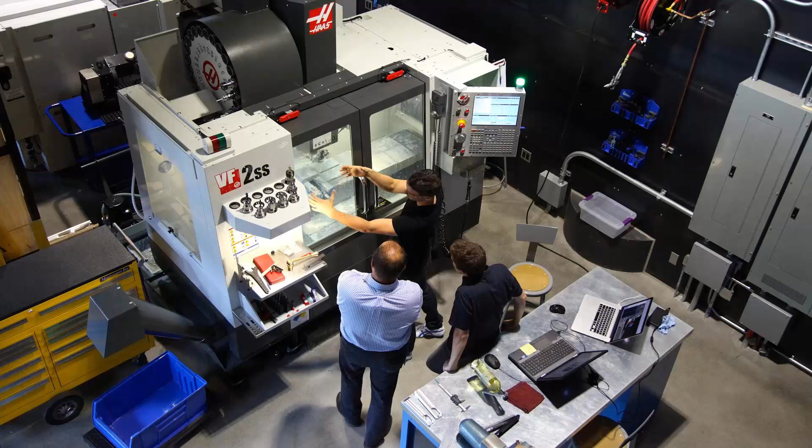I want to start our webinar today by talking about a facility located in San Francisco called Pier 9. Pier 9 is sort of like a dream space for engineers and designers. Inside this space are all these wonderful machines that most engineers and designers can only ever dream of having access to, and these machines are used to help develop the solutions that our programmers work on.

But they are also used by what are called artists in residence. These artists come and do a residence at Pier 9 where they really push our solutions to the limit. A really good example of this is shown in the following video.

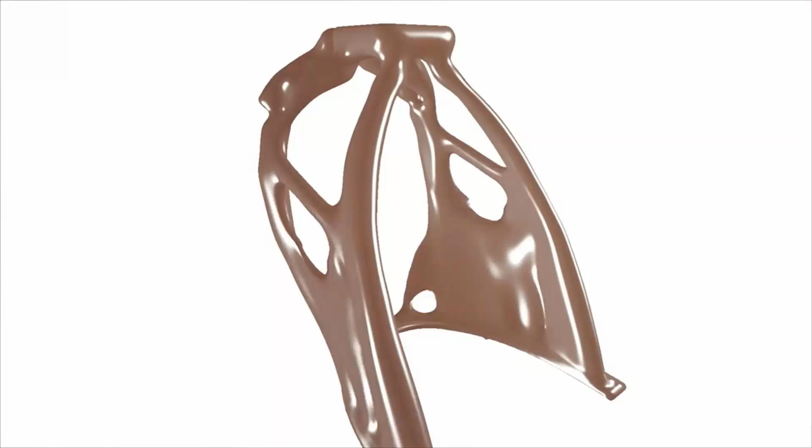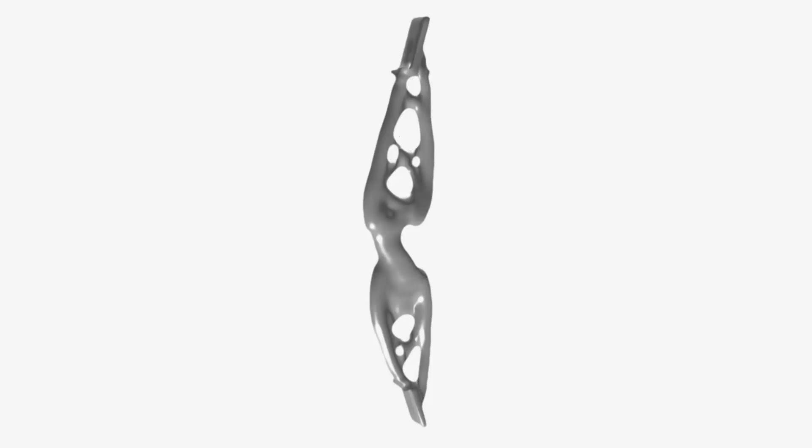This video highlights the use of some generative design technology, and it really shows you some of the future of where generative design will be. In this instance, the artist has come up with the idea of creating the structural section of an archer's bow, and they're going to use this technology to design the product for them.

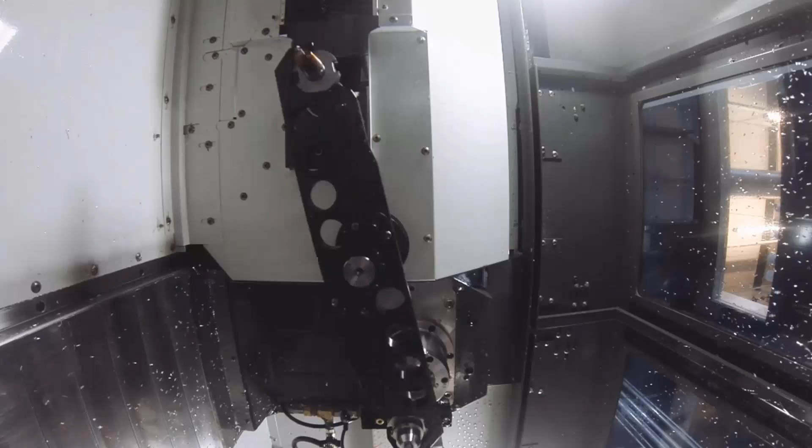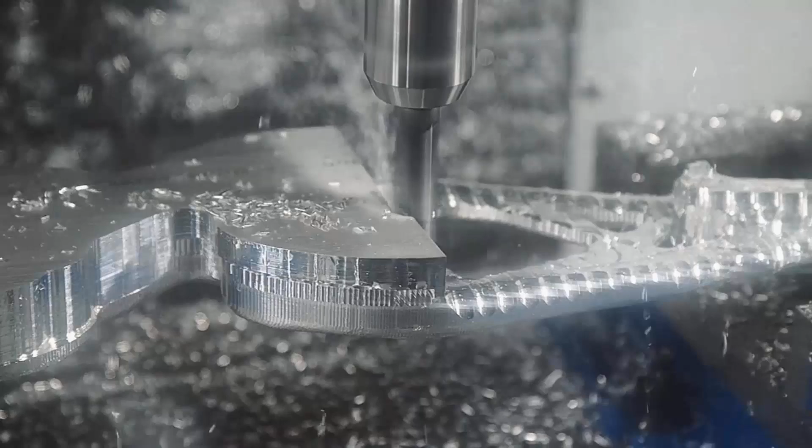In essence, the machine or the software is creating the geometry based on parameters: the loads, the volume of space that the material can occupy, the material that the part is being made out of, and then it comes up with that optimized shape.

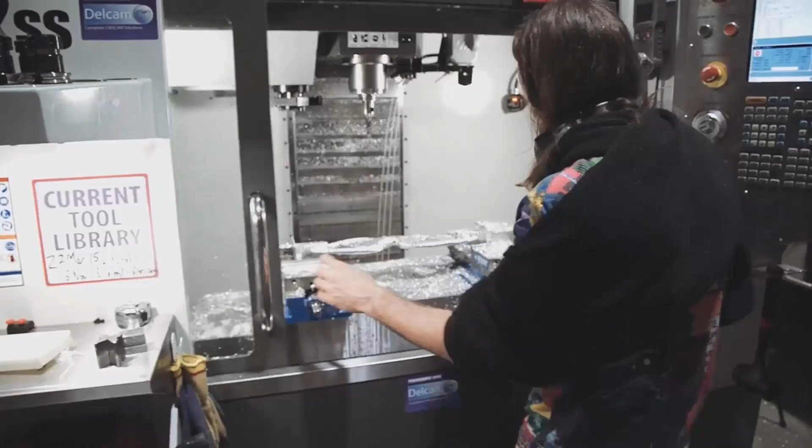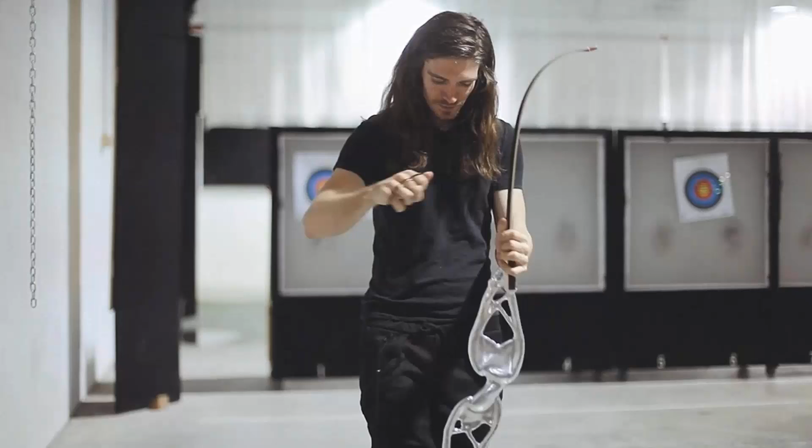You can see here that the part is actually being milled out of a solid block of aluminium. It could have quite easily been 3D printed out of aluminium or titanium, for instance, and then it's assembled to show that the bow is a functional piece of geometry, not necessarily just a piece of art.

I like this video because it really highlights the changing landscape of manufacturing and the new innovative ways that manufacturers in the future will use technology to help improve their designs, but also to segregate themselves from their competitors. This really does bode well for the future of making things.

If you've attended any of my webinars or seminars recently, you will have heard me talk about the future of making things. In particular, we talk about three disruptive factors: the methods of production, the demand of consumers, and the types of products that we make. Each of these has elements of generative design contained within them.

New manufacturing processes and new ways that we design our products are specifically related to generative design. The demand from the customer is that there's a drive now for more optimized solutions and products, and the products themselves need to be lighter, smarter, and better designed.

If you look at each of these disruptive factors, there are elements contained inside each of those that are particular to the need to start considering the ways that generative design can help you in your design processes.

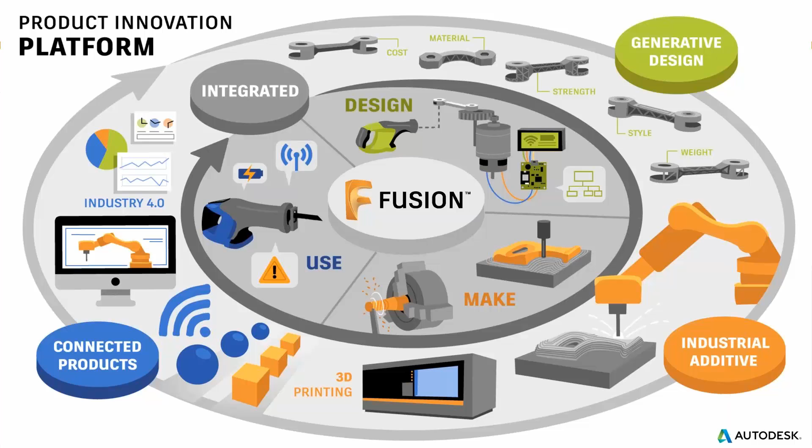If we move forward and look at why you would use simulation, we've had this discussion a number of times over the last 6 or 12 months in a number of webinars I've run. Simulation really does help make better decisions, but more importantly, it helps you make those decisions sooner, and we'll try to highlight that through today's webinar.

If you look at some of the questions that engineers are asking themselves day in, day out: will my part fail? Will it overheat? How can I produce components faster? How strong does it need to be? Will failure occur, and if so, when? All of these types of questions engineers are asking themselves, trying to predict the answers, and that's where simulation plays a role.

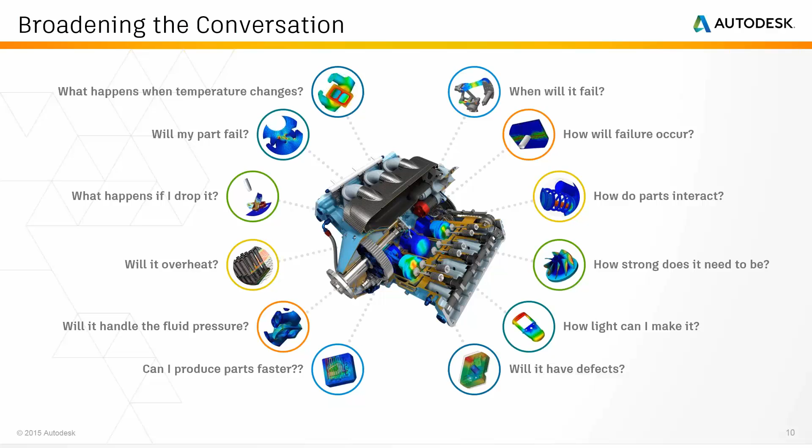And if we've gone through all of the stages of producing a detailed design, the tooling, maybe even made some parts, then the cost associated with making change that late in the life cycle is quite possibly prohibitive and could potentially put a project at risk.

If you consider pushing that forward, much earlier in the design stage, then the cost associated with making the change is significantly less because the change itself is much easier. Generative design really does push the boundary because it's pushing a lot of that simulation and design stage right back to the conceptual, very early stage design in the life cycle.

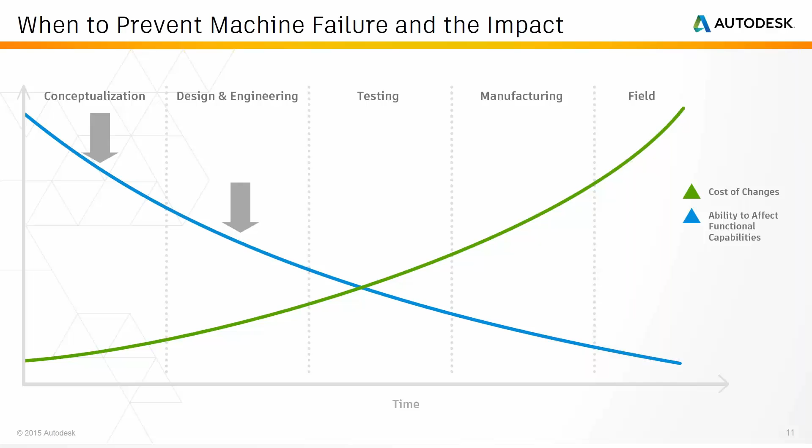If we consider the advantages of using simulation, there's obviously time. If we can reduce the number of iterations that we need to make of our parts, then it's going to save us time. Potentially it's going to save us money as a consequence of that, not only the development time, but also the cost to actually develop prototypes and test your products. Maybe even more importantly, it's going to give us some insight into the way that our products are going to perform.

But I'd like to highlight today the way that simulation in particular, how some of this predictive analysis or generative design can help you innovate new products. So a couple of quick examples.

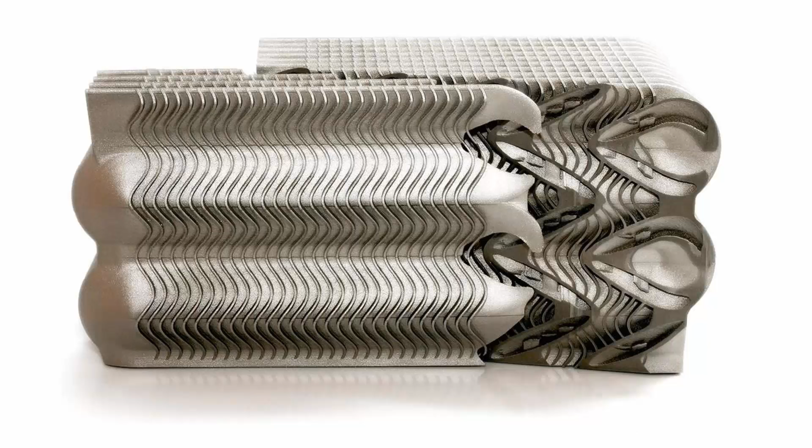Some of you may have seen this example before. I've used it a couple of times, but I think it's quite innovative in the sense that this product for this customer could completely radicalize or change and disrupt the industry that it's in. It's a heat exchanger, a product that was designed using generative design. So it wasn't designed necessarily by a human. The human put in the parameters associated with the volume, the size, the space that could be used in this case, the material, maybe the material that was being cooled or heated, and then the software took over and created the geometry of the part.

If you consider this for a moment, it's a very complex part, it would have taken considerable effort for a human to have designed this. But not only that, if you consider the way that it would be manufactured, it would have been extremely difficult to cast, fabricate, machine, whatever you want to use, extremely difficult. So much so that really the only way you could manufacture this part is by using additive manufacturing or 3D printing, which is the case with this component here.

So if you consider maybe 10, 15 years ago, this type of product wasn't possible. But now with the technologies that are coming of age, there are now opportunities for customers or manufacturers to completely radicalize and disrupt their industries by offering these types of products.

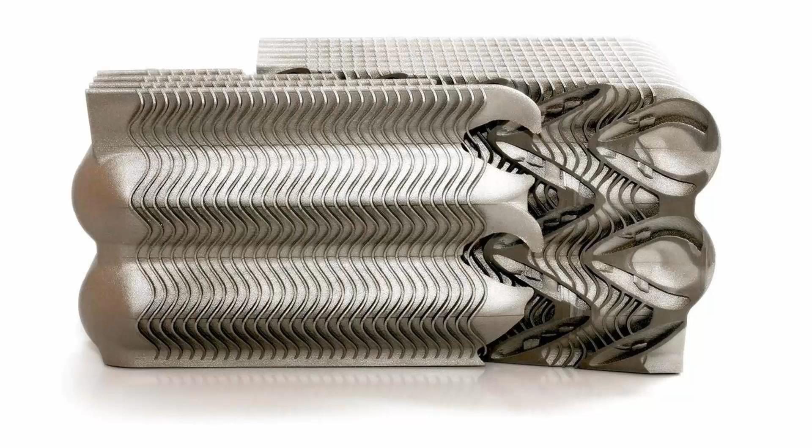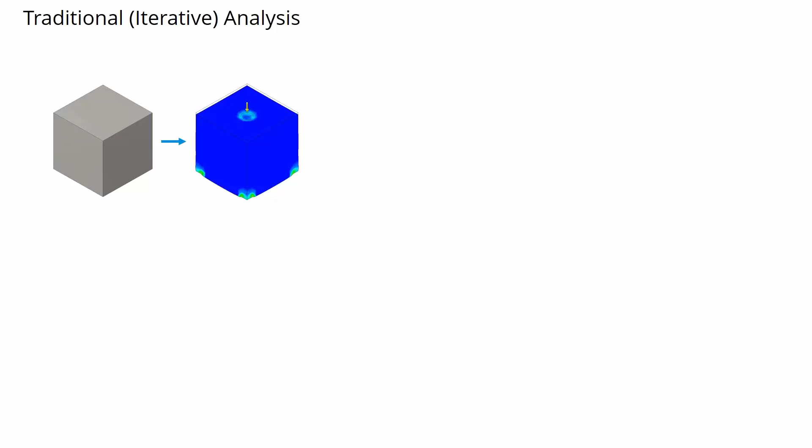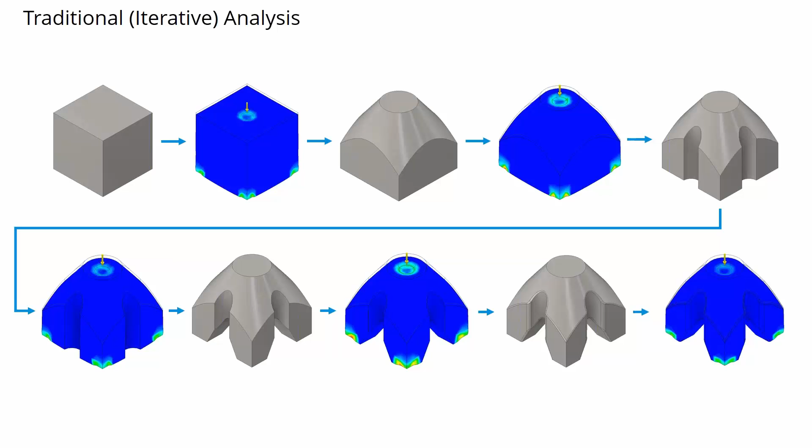So what is generative design then? Well, I like to look at generative design by firstly looking back at what a traditional analysis is. Traditional analysis, as I see it, is a very iterative process. We start out with a volume, a space, and then we run an analysis on it. We look at the results of our analysis. We remove some material, try and optimize it a bit. We run another analysis, remove some more material, and if we haven't given up by this stage, we might run another analysis, make some changes, run another analysis, make some changes, and then confirm that our part meets our desired needs. The problem here is that we're really limited on our ability to take the feedback from our analysis and then apply that to the geometry.

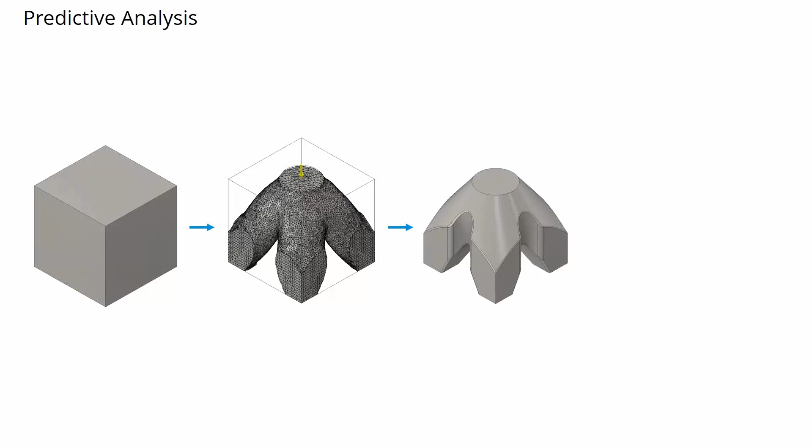This is where predictive analysis or generative design really turns that process on its head. We start with the same block of material or space, apply the same loads and constraints, and then the predictive analysis comes back and suggests to us a topology or shape that is optimized for that specific loading criteria. We can then replicate that inside our CAD geometry. And then, as a final step, just confirm that the structural load can be supported by the shape that was generated, recognizing that the shape generated in this instance was based not on the load itself, but the load path through the part, and our desire to remove material.

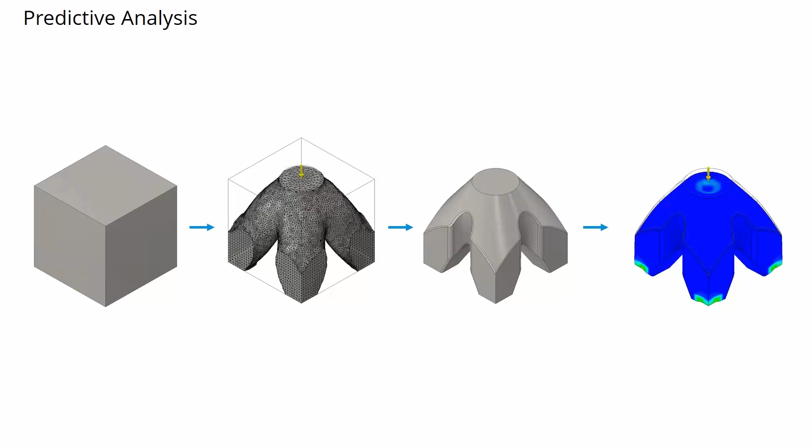So this is where Shape Generator comes into it. Shape Generator came about in the 2016 release of Inventor, and includes the ability to use this predictive generative design type of analysis. I'm going to give you a quick introduction to how you can use Shape Generator, and then we'll look at a couple of examples of ways it can be used.

Bear with me as I quickly switch. So here we are inside of Inventor. I've got a very simple part, and this highlights the fact that you don't need to be designing complex parts. Maybe you're just looking to minimize the weight of your components to try and minimize the overall package or design of a product, giving your customer a performance enhancement.

Maybe it means they can carry more load if they're a trailer manufacturer trying to reduce weight. The fact that they can retain the same strength, or sufficient strength, to carry more load could be a critical difference between you and your competitors.

So in this example, that's exactly what we're going to do: look and see if we can make changes to our design, reduce the weight of our part, but still allow us to carry the load that we require.

You'll see here inside the menu structure, we've got the Shape Generator icon located here. Now we can access that by going to our Environments and Stress Analysis. It's going to enter us into the same environment.

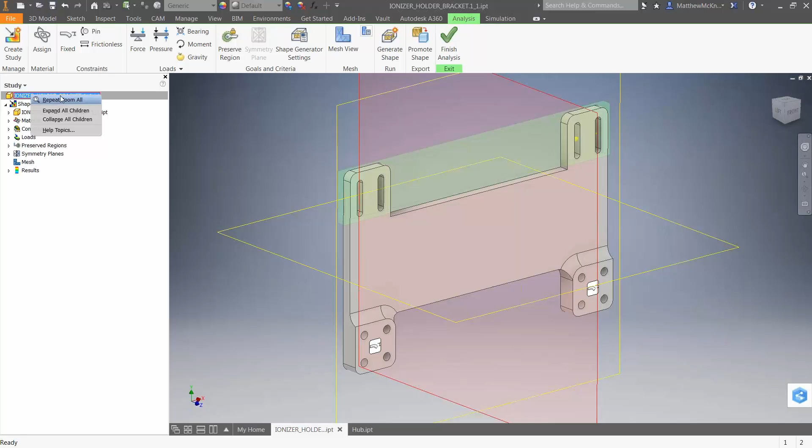In the first instance, I've already got a Shape Generator study set up, but what I'll do is actually create a new study by clicking Create New Study. You'll see here we're given the typical analysis types we've come to expect inside Inventor simulation, and that is static analysis and modal analysis.

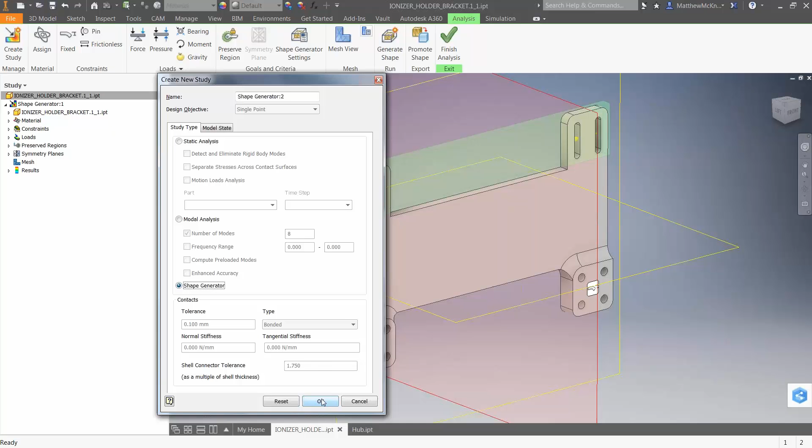Now what I want to highlight is this one at the bottom, Shape Generator. This is where we get the generative design aspects directly inside Inventor Professional. If I click OK, it's going to give us a pop-up box that tells us a bit about our design, highlighting that you should perform a separate analysis to verify the stress levels are acceptable. I'll just highlight that again to you.

So it's carried over any materials we've assigned to the parts. Notice that on our toolbar, the first section is reasonably generic. If we're accustomed to using Inventor simulation, we'd feel comfortable inside this environment already.

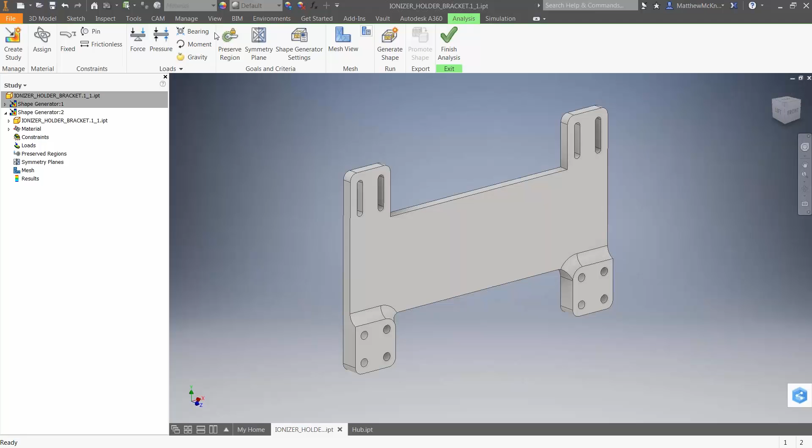In this case, we can add a couple of fixed loads, and I'll just fix those bottom faces down there. We can also add fixed constraints, and we can also add pinned or frictionless constraints.

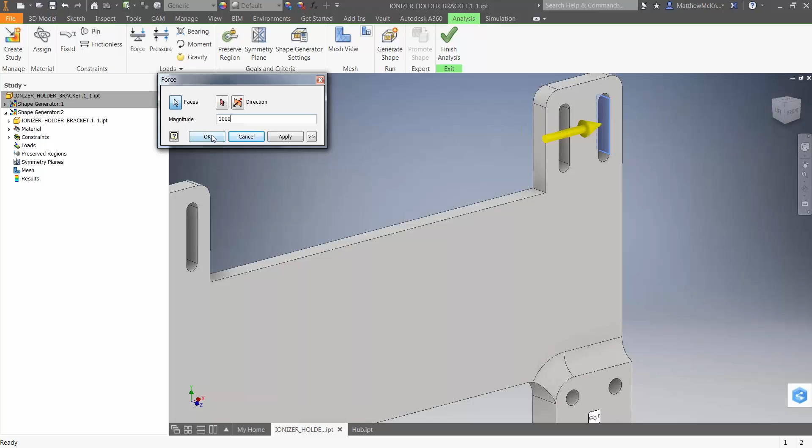Let's add a force, and I'll apply that to a face over here. I'm going to give it an arbitrary number of 1,000 newtons, and you could just as easily apply pressure, bearing, moment, or gravity to the part as well.

Now this is where it gets really interesting, because once I move past our loads, constraints, and materials, we get tools that enable us to specify how we want our Shape Generator study to run. In the first instance, we've got the ability to preserve regions.

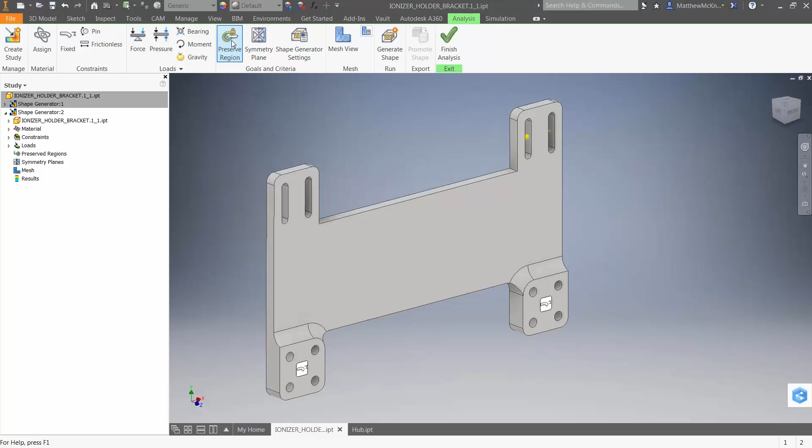This is where we want to retain specific geometry of our part without the Shape Generator removing that geometry. You'll note that if I click on some geometry, I'm given a box that I can drag over specific areas of my model or design, ensuring that geometry is retained and not removed from the analysis.

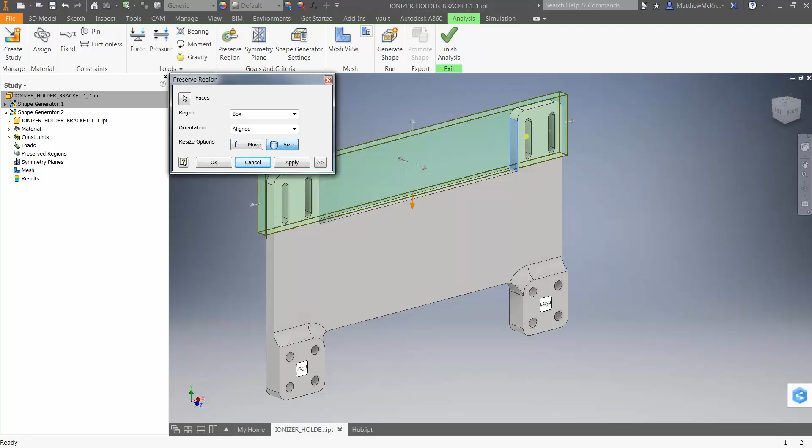So I can do that on both a box shape, or it could be a cylindrical shape as well. We'll hit OK, and you can see here it's just highlighted.

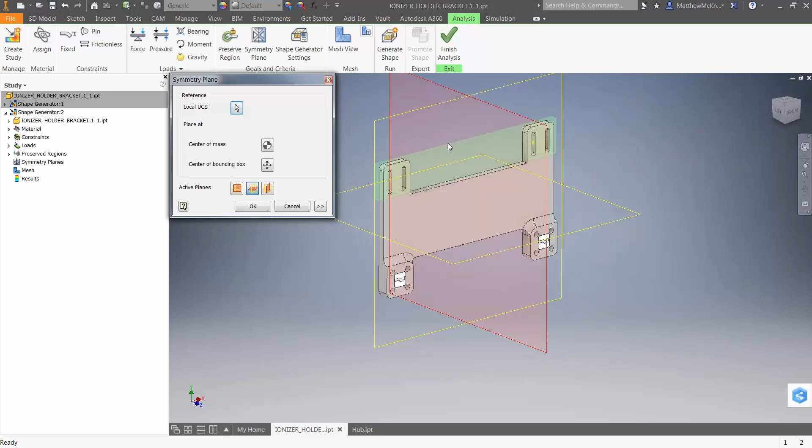Likewise, I can also access a symmetrical plane through the part. So if I want to make sure the part is symmetrical, I can do that as well, turning on or off any symmetry associated with the part. In this case, I want to make sure the part is symmetrical about the left and right, so I've chosen the plane associated with that. Then we can hit OK.

We can also put in a minimum member section size. So if the shape generator study comes back with all kinds of webbing in the part, and we want to make sure we've got a minimum section, we can come in here and maybe put that our minimum is 5 millimeters. Beyond that, we can adjust our mesh resolution, coarse or fine, hit OK, and in the instance where you've got quite a small minimum member size with quite a large mesh, it will actually come back and warn you associated with that.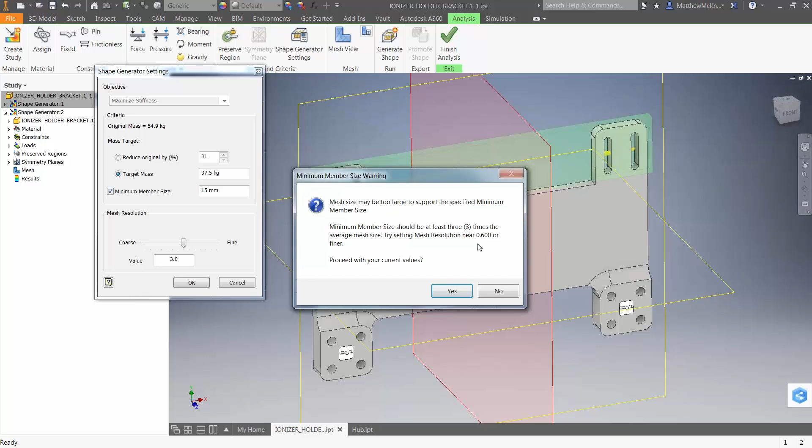The idea here is that you would then go back and modify this, and you can see it's recommending that I try a mesh resolution size of 0.6, or inversely I go over here and adjust that. As I adjust between those two, it's going to adjust the number that I need in the associated dialog box.

Beyond that, really all I do is hit generate shape. Now I'm not going to do that because it will take a few minutes to solve. Instead, let's go back and look at a study that I've already run. So here's the same part, and I'll hit activate, and you'll see here's the results that have come back.

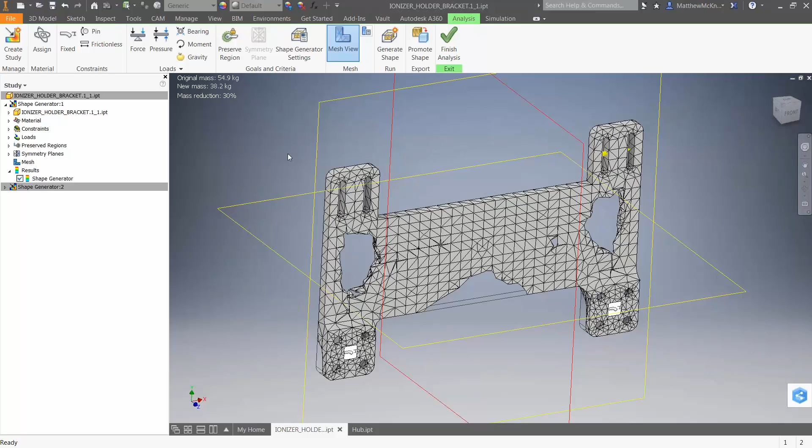You can see here that the goals and the setup were slightly different to what I ran just a few moments ago, but the part does come back and gives us some insight about the loading through the part. Remember that this loading is really talking about the load path, not specific to the number associated with the load. So you will need to confirm as a secondary operation that the part can support that load.

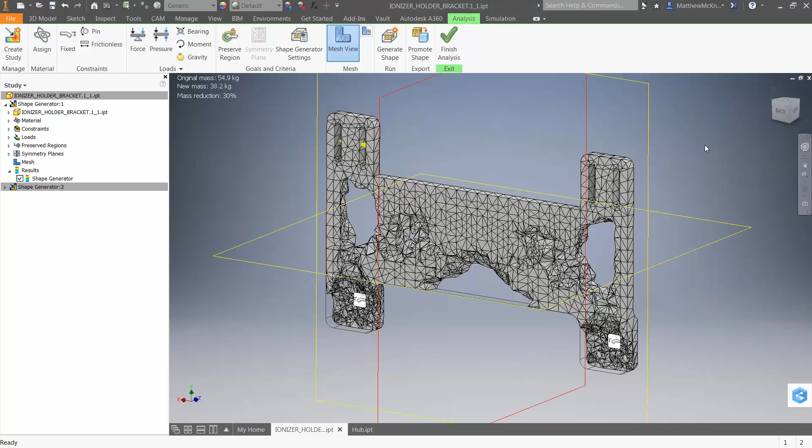But you will see here that the geometry does give us a really good indication of those areas of our design that, if we wanted to remove material, potentially those areas of the design may not be adding to the overall strength of the part.

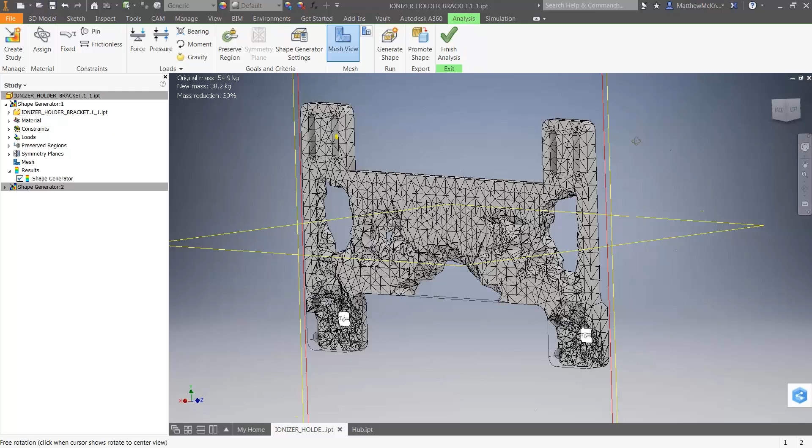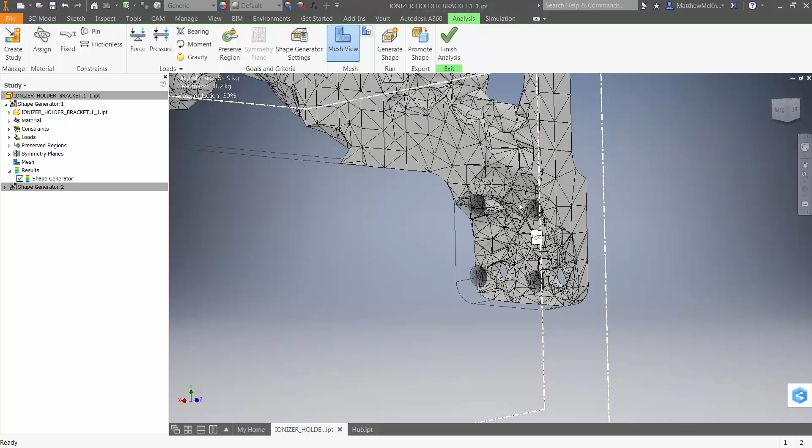So you can see here that I've got some areas or pockets. Maybe I'll rotate around so I'm looking at the front of the part. You can see that I could potentially pocket out the part on the left and the right, and potentially pocket out the bottom here. And down towards the bottom brackets where the part mounts onto the part, I could potentially even remove some of the material in this localized area as well. So that gives us some really nice insight into the part and the ways that we can optimize it.

How do we do that? Well, we do that by promoting the shape. If I click on Promote Shape, you'll see that I can either promote the shape to the current part file, which gives me the ability to use that then in the means of being able to use it as a template to create the geometry.

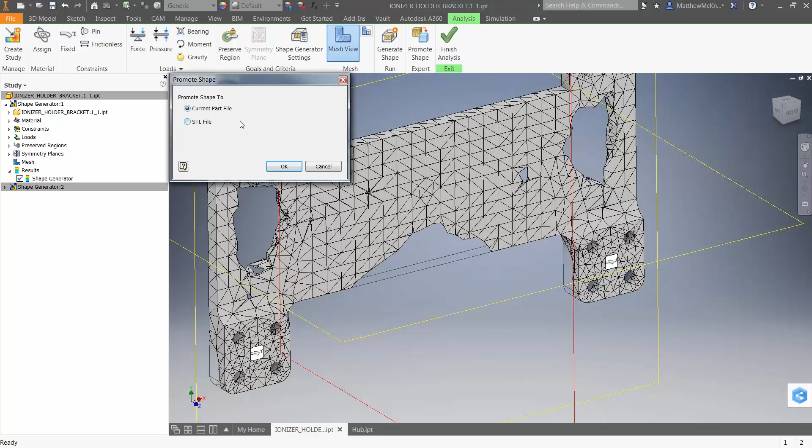Or I can create an STL file, in which case it would export the STL file—maybe I want to 3D print that optimized shape directly to a 3D printer. In this case, I'll use the current part, and you'll see the part has been promoted, and I can see the geometry through the part, which gives me the ability to go on, create sketches that define the shape of the material that we want to remove, and then functionally remove that from the part.

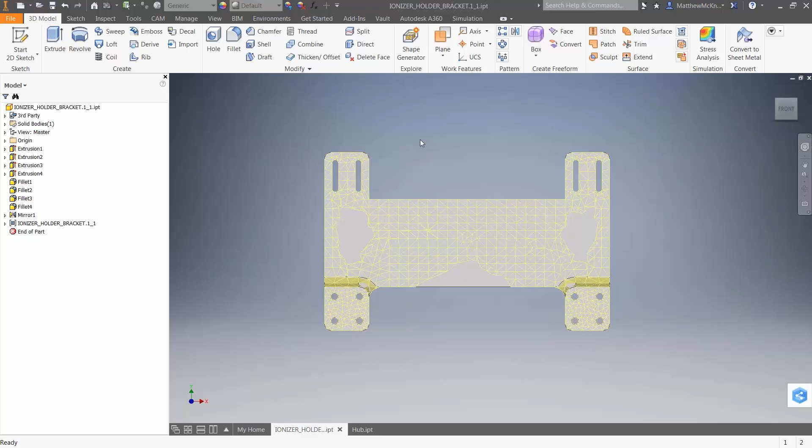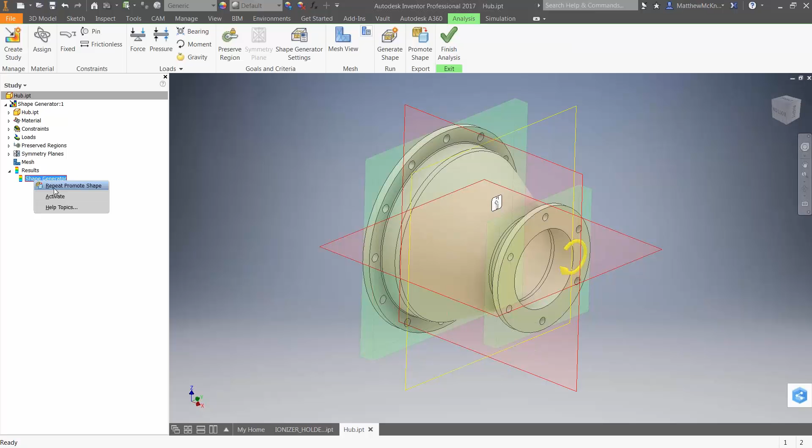It creates shape generator studies with some really interesting geometry. If I look at this part here, a different part with a different load applied - this was a torsional load on this end face, with a fixed constraint on this other face. If you activate the study, you'll see a nice lattice type structure, which is almost what you'd expect to support that type of load.

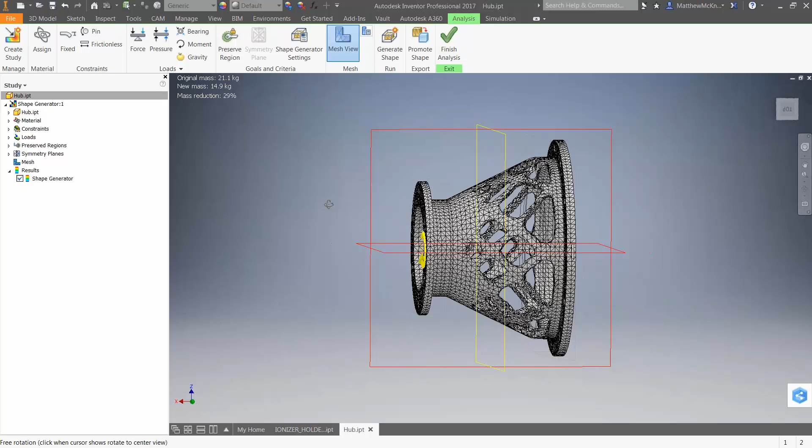In this case I created symmetry about two planes to ensure I was getting symmetrical geometry that I could use. Now potentially I could export that geometry and start using it to create this optimized part. Remember, as a secondary process, after you've used the shape to remove material from your part, you'll need to run another analysis to confirm the part can support the loads based on the constraints and setup of the geometry.

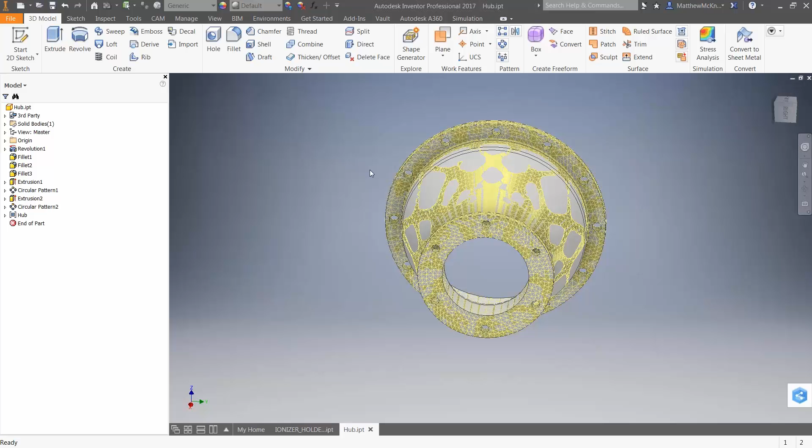Okay, so let's go back to our presentation.

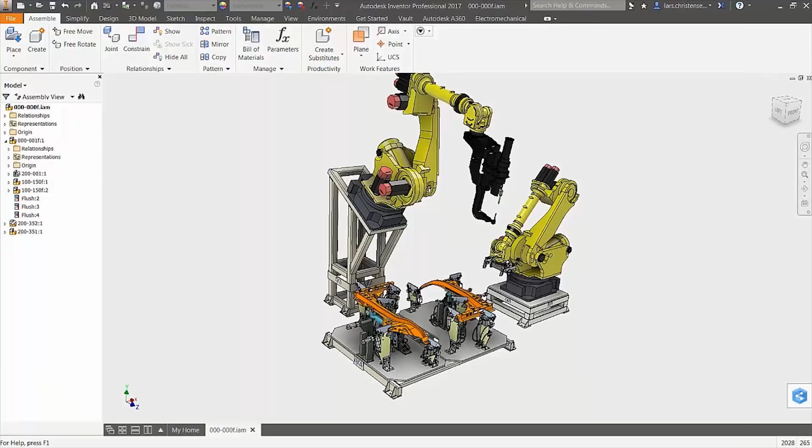Let's have a quick look at another couple of examples of how using shape generator can help increase your innovation capacity - two relatively quick examples, again using reasonably generic geometry to highlight that this can be used across a wide range of industries. Here we have a design - it's a hydraulic or pneumatic cylinder, a clamping component holding down sheet metal, part of a larger assembly.

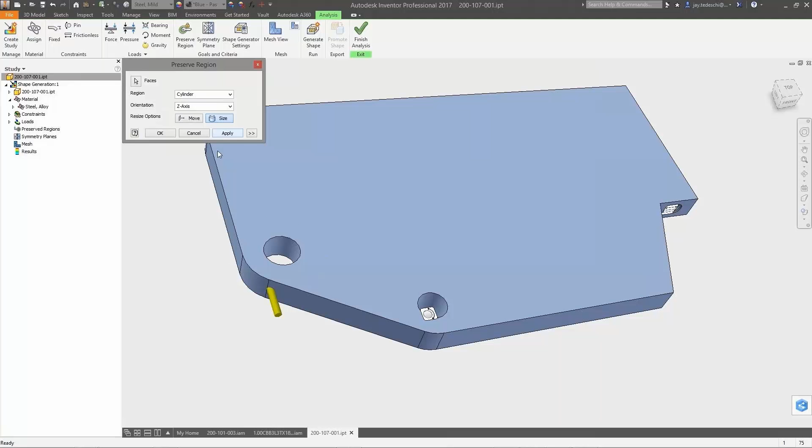The idea here would be to optimize our design - maybe changing the hydraulic or pneumatic cylinder to run at higher performance, at a higher speed, giving us a competitive advantage in our market. What we can do is use Force Effect, available from a web browser or directly inside Inventor, to understand the loads on our part, and then given those loads run a shape generator study directly inside Inventor to get an optimized shape for our design.

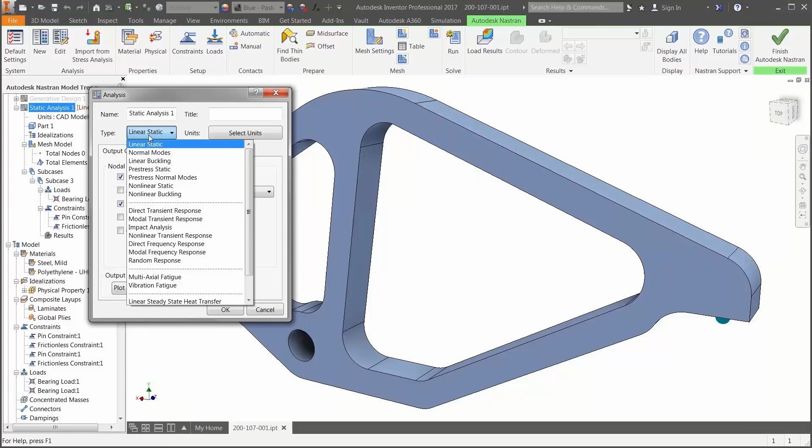After migrating that geometry inside Inventor, we can quickly replicate the form of our part and understand it. Then in this instance we've run further analysis using Nastran InCAD to understand the part and its susceptibility to different failure criteria.

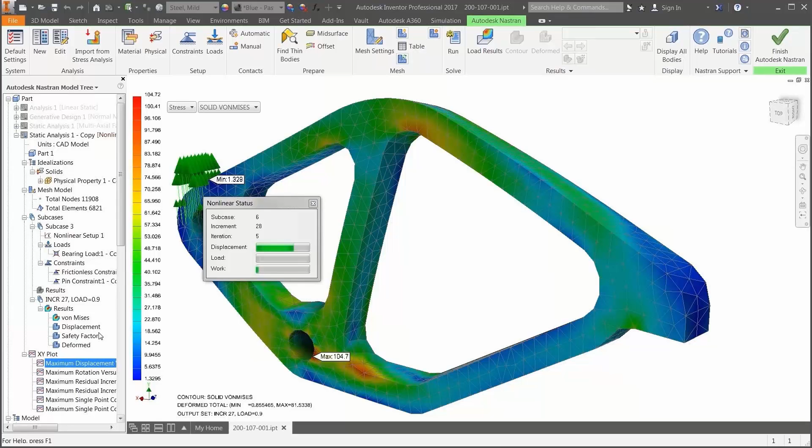We're even considering different materials, which is one of the key aspects of running an analysis like this - the ability to quickly assess how various shapes, geometry, and materials affect our design. You can see in this case that using a different material, I believe a plastic, means the part would potentially fail due to buckling.

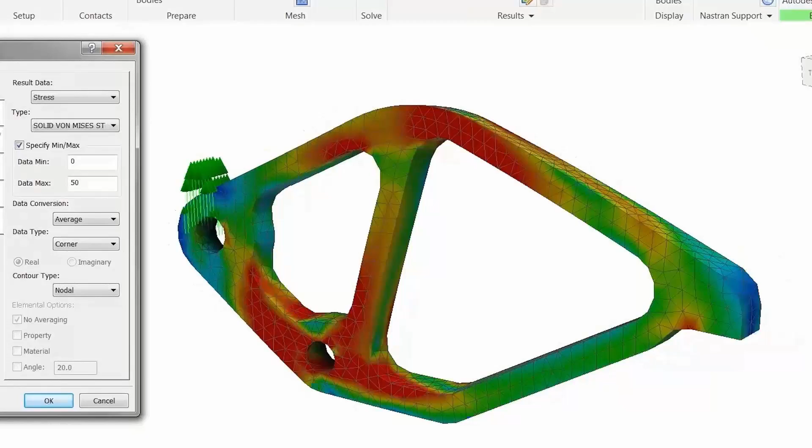So again, the value of using shape generator here gives us the ability to quickly and easily generate an optimized shape, test that part, make sure it structurally meets our requirements, and then improve the product performance of our design.

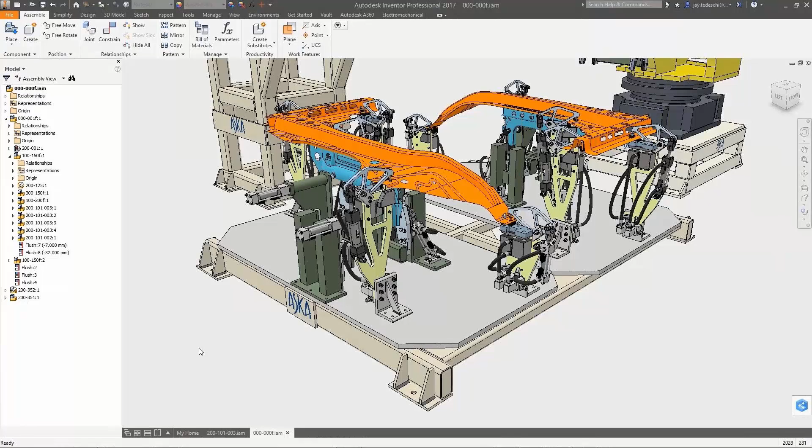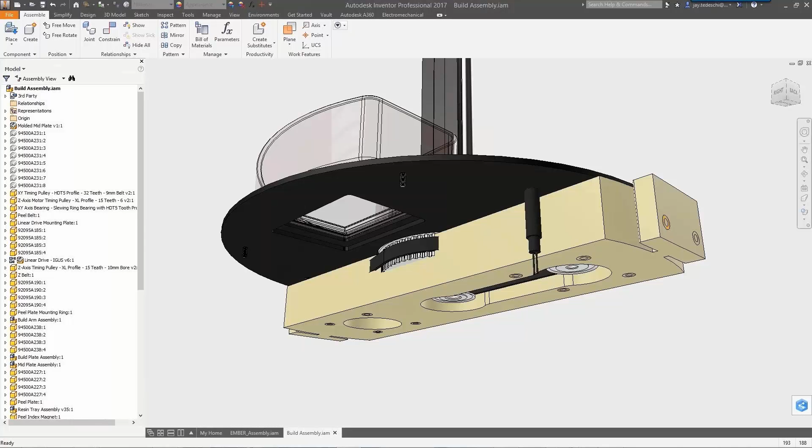Likewise, here's another example where we have maybe a casting or machined component, and we want to look at a design alternative. In this instance we're using Vault, our data management system, to replicate an existing design and then quickly run an analysis using the shape generator study.

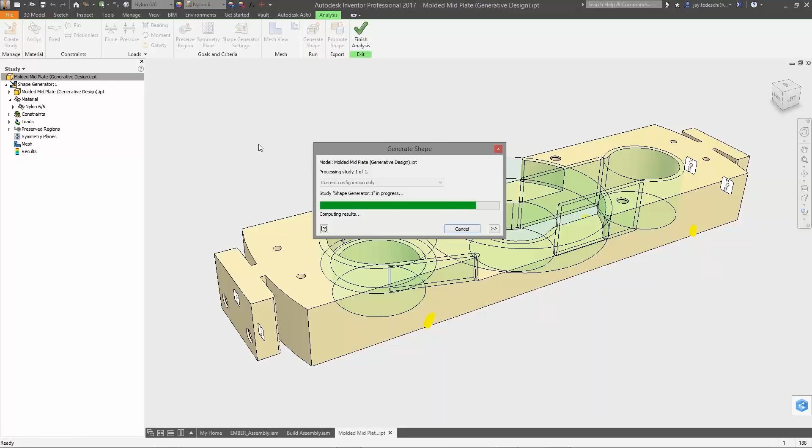Like we showed before, it's very quick and easy to set up one of these studies. We use some of the typical setup features we'd use if accustomed to Inventor simulation - the constraints and loads. We apply information about how much material we want to remove, and then quickly and easily run the analysis, promoting that shape and replicating the geometry within.

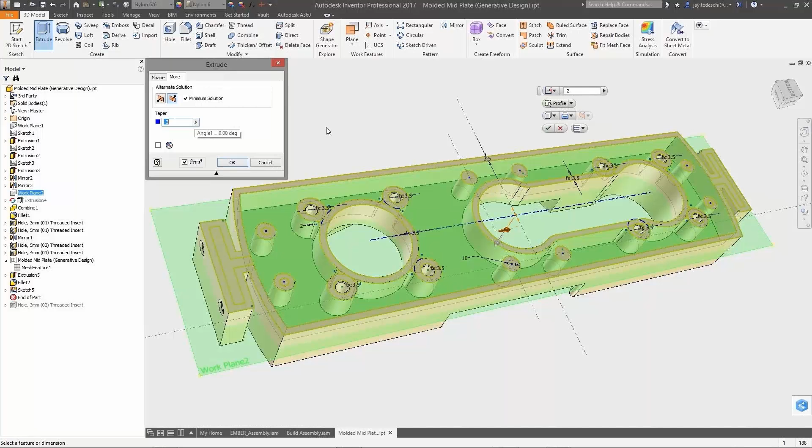So you can see here a couple of really interesting examples of the use of shape generator on some reasonably practical examples of our parts inside Inventor.

So let me have a quick look and see whether there are any questions from anyone during the session. No questions today.